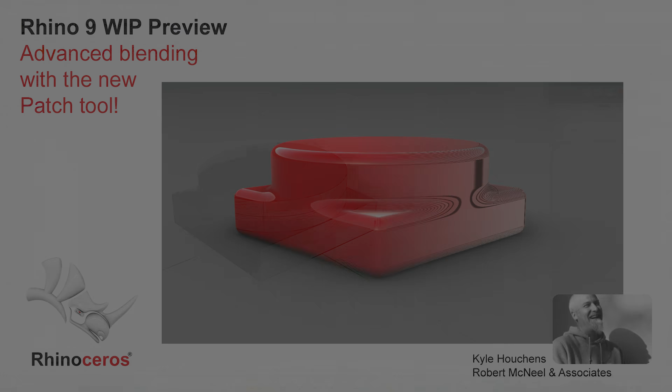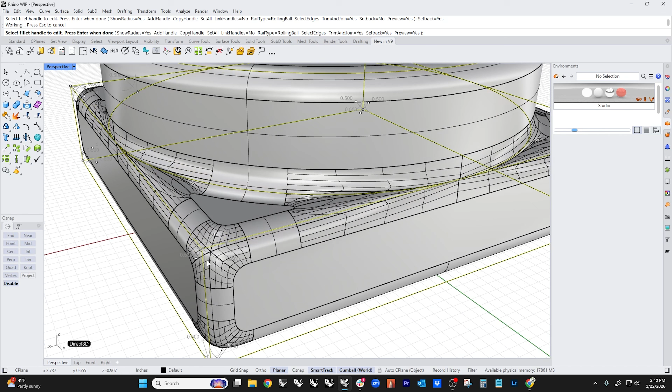This is what I refer to as the watchmaker's blend. If I grab the fillet tool and run a 0.5 unit fillet on this, we get a result. If I change this to setback, we get a slightly different result, with nice setback corners, which is a new thing for 9. But I'm not going to set that back, I'll leave this as it sits. So what we end up with is a result. We can argue whether this result is good or bad. I think the result in the corners is good, the result here is good.

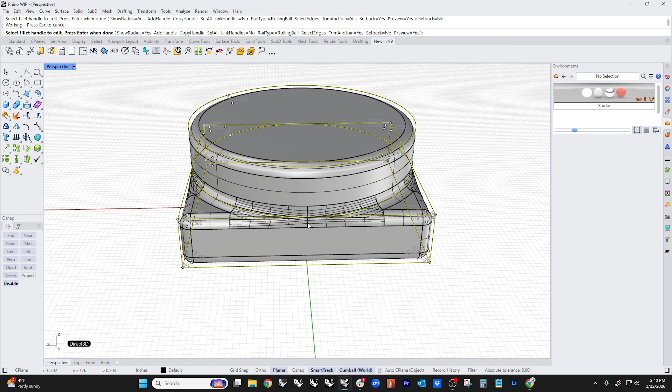In the past, what used to happen is there would be a diamond-shaped hole that would appear in this area. With some improvements to the filleting in V9, this actually delivers a result, but it's not necessarily an awesome result. I'm going to go ahead and run this and show you what I mean.

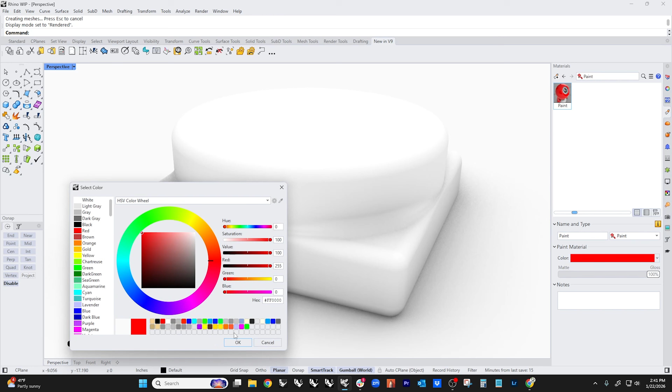So if we change this to rendered, if we add a material in here and give this a color, you can see that we've got kind of a messy highlight in there. See how it's bouncing up like that? That's not what I would consider a good result.

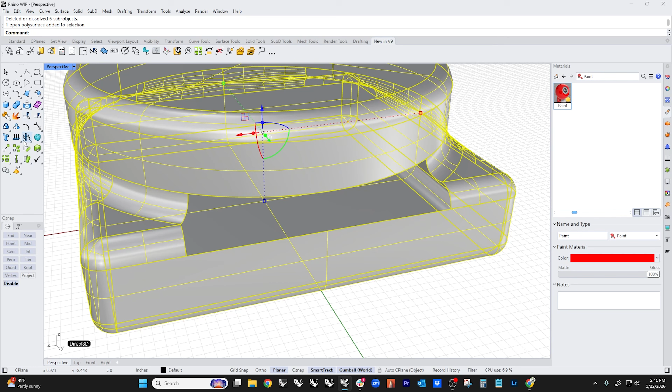However, what we can do is take what this has given us and remove these surfaces. I'm just Control-Shift clicking them and getting rid of them. And if we look at the resulting edges, we've got some edges broken up like this.

What I want to do actually is put some of those edges back together with the Merge Edge tool. I'm going to put these guys back together, and these guys back together. I'm going to leave these two split.

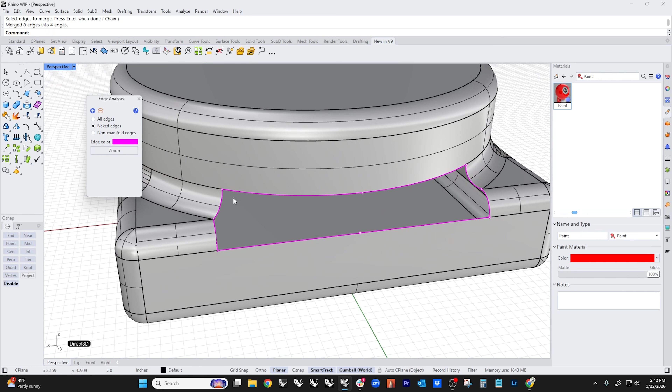What I'm going to do is set myself up for success by coming in here and making a proxy surface with blend surface that goes from here to here. Now, you'll notice this isn't even close to joining up. It doesn't do anything useful down in this end. But what it does do is give us this section right in here, which is what we actually want.

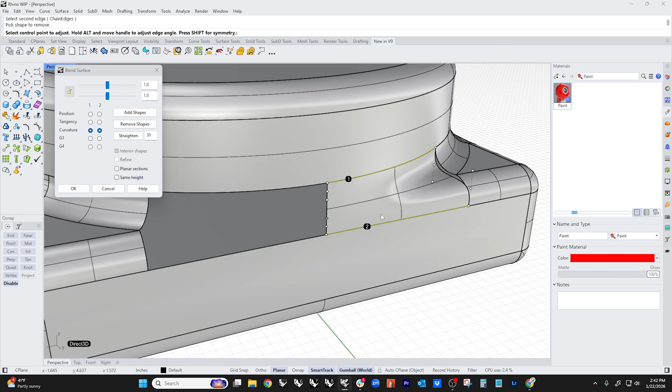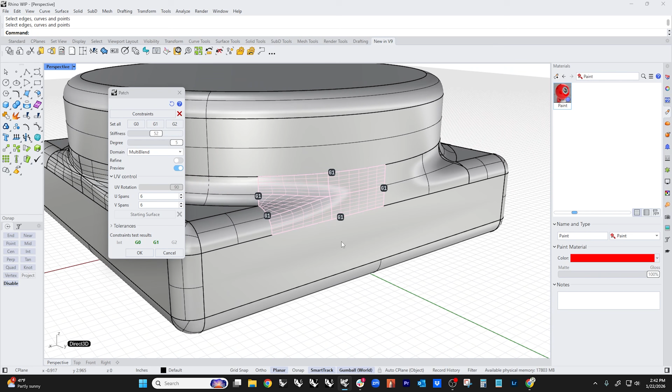Then I'm going to run the new patch command. I'm going to select these edges, specify them all G1, and then bring the tool up. We're going to set it to multi-blend, and then preview it. You can see it actually comes through here fairly quickly and builds a poly surface that blends in several directions and gives us a really nice highlight flow.

Now I'm going to delete this proxy surface. I'm just going to mirror these over, and then we'll join this up. And you can see that we end up with a closed poly surface.

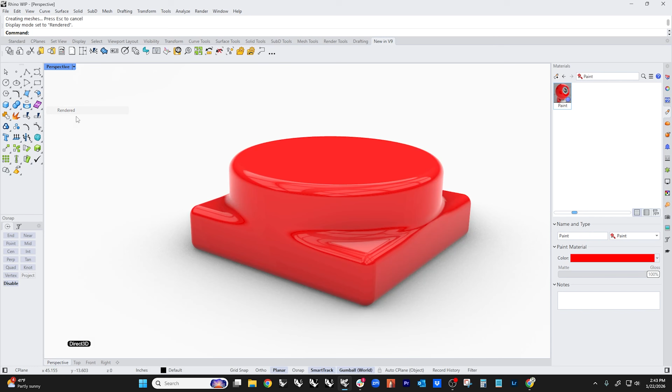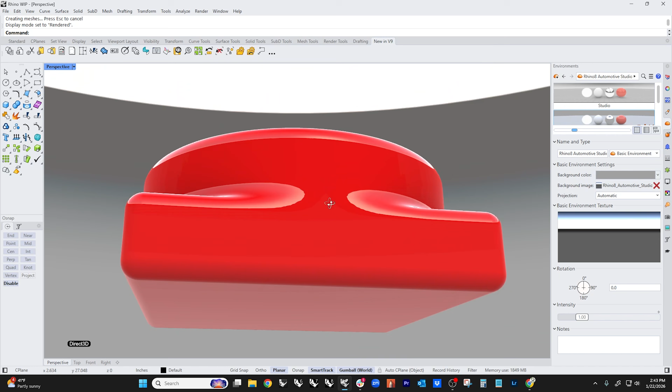If we now take a look at this in rendered mode, you can see that our highlights look good. I'm going to switch to a different environment here, let's switch to the automotive environment because highlights track a little nicer in it. And you can see the difference between how the highlights track on this blend right here versus this blend right here.

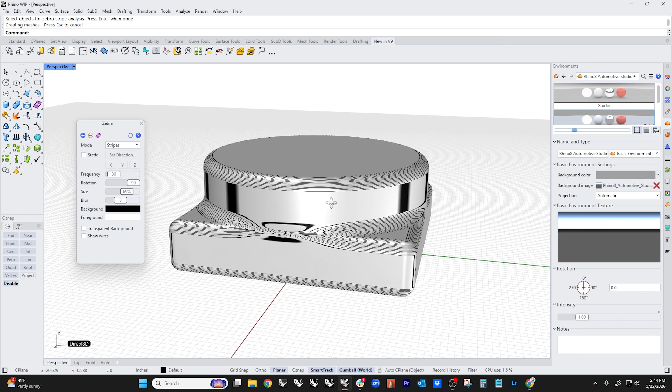Just to remove all chance of cheating and stealing, let's throw the lie detector on this, which is zebra, and take a look at what we've got. So this was the original result, which we can argue is better than just leaving a hole because it gives us something to work with if we delete those surfaces. This is patch with multi-blend, and you can see that the highlights are tracking really, really nicely.

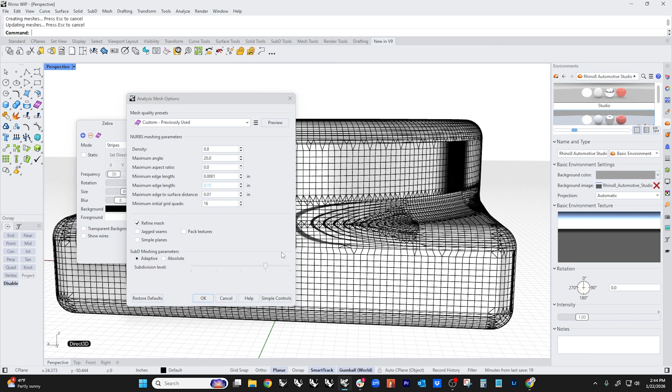In fact, we can even crank up the mesh in here, let's do a little bit more detailed mesh. And you can see that we're getting really, really nice lines, no jumping like we have here. Very, very clean, very easy.

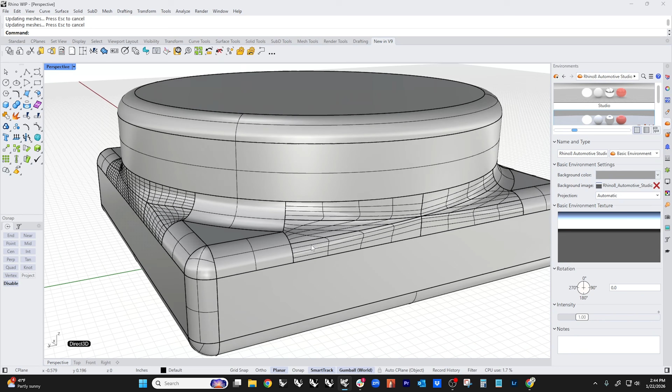If you noticed within the patch tool itself, there are some continuity tools that actually reported on whether or not your continuity was correct. I'll run it one more time so you can see what that looks like.

Got to repair our edges over here. This is the merge edge tool, by the way. A lot of people haven't seen this before, even though it's been in Rhino forever. It allows you to repair, put edges back together if they were split internally.

Let's put our proxy surface in here. I'm just going to let that run. I'm going to leave it at curvature, which is fine. And then we'll run patch again.

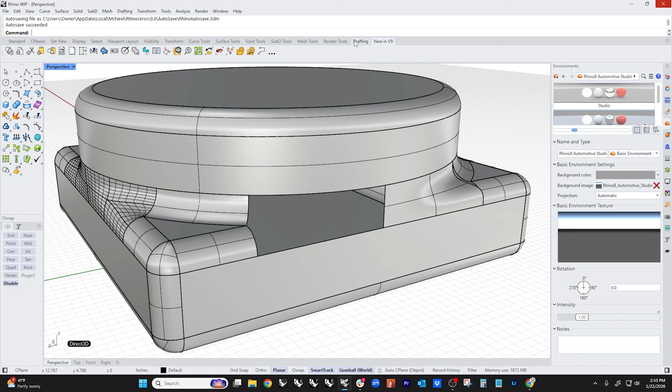You'll notice that each edge has a continuity assigned to it. Now I can click this and change its continuity, but I'm going to leave it all just at G1 right now, because we used fillets and not curvature-based blends, so G1 is going to be plenty for what we need. So we're going to run it.

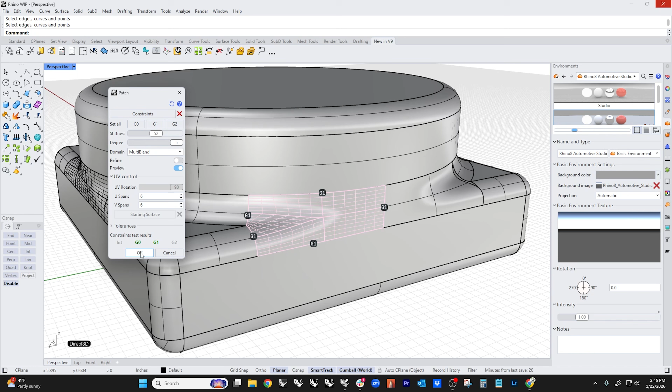I'm going to preview it, and down here you can actually see that not only have we achieved G0, but we've also achieved G1. So we know that when we run this, the surface is actually going to join.

I'm just going to replace this one, mirror it over, and join. And we know that this is going to join up because it passed our continuity test. Then we take a look at it, and we end up with the same result that we had over here. Okay? Give that a try.